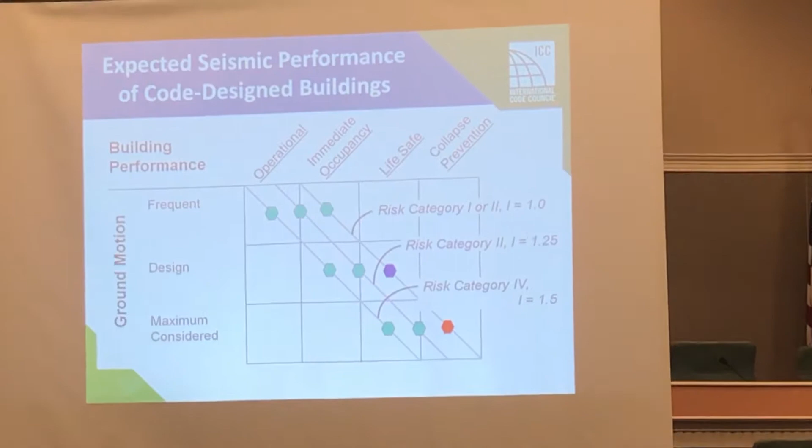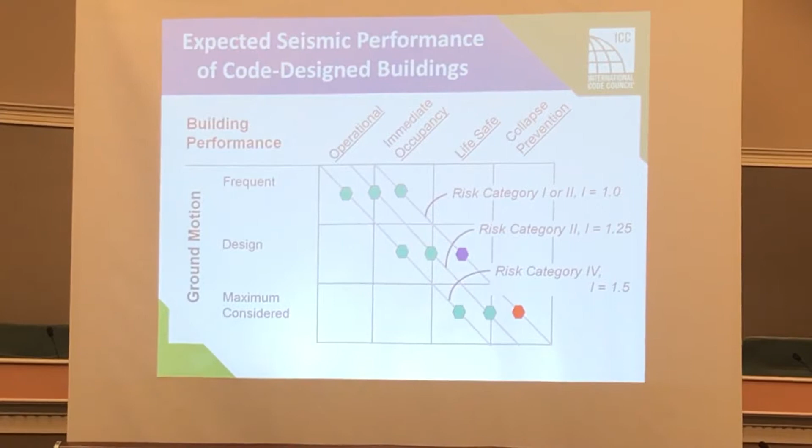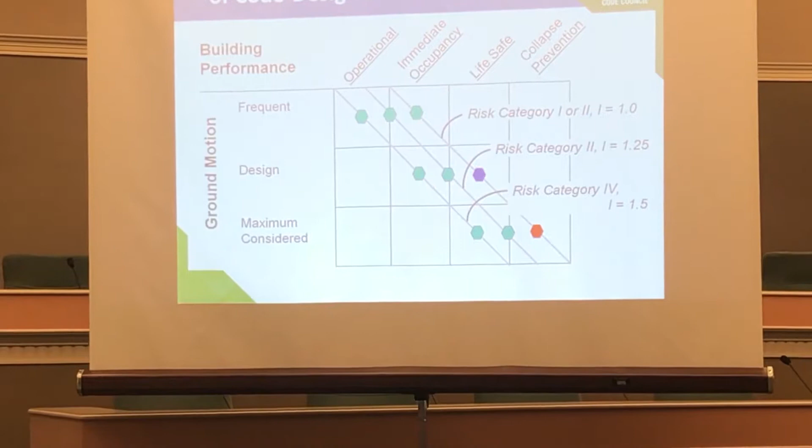So this is a quick look at what it is that we have been doing. Let me see, the pointer isn't very... it doesn't work.

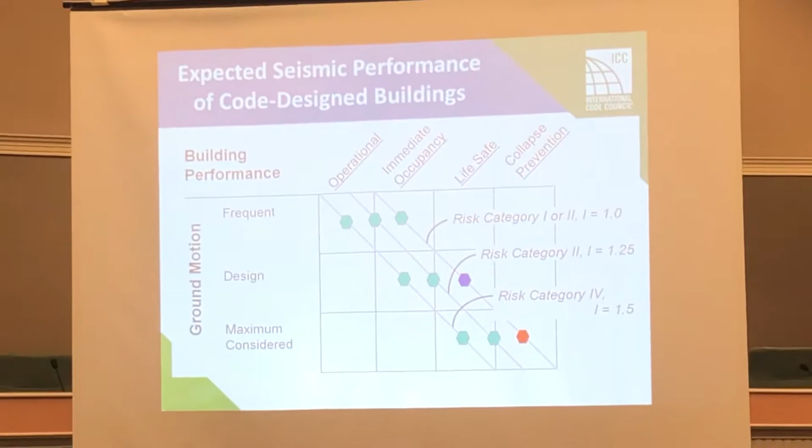Okay, so if you focus on the right-hand line which says risk category 1 or 2, those are the buildings that we design most of the time. Risk category 2 would be all office buildings, apartments, etc. So those buildings are being designed, if you look at the red dot, to not collapse in the maximum considered earthquake, which would be an earthquake that comes every 2,500 years or so.

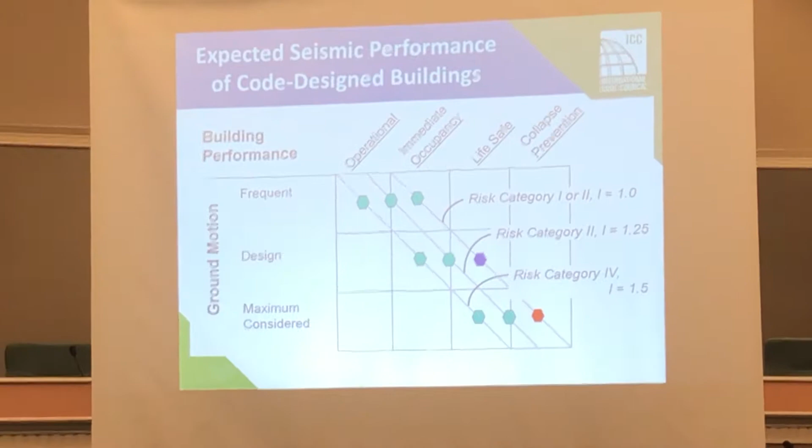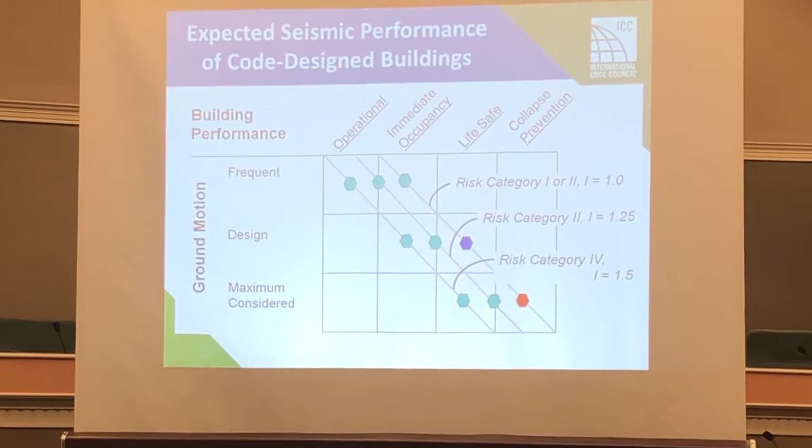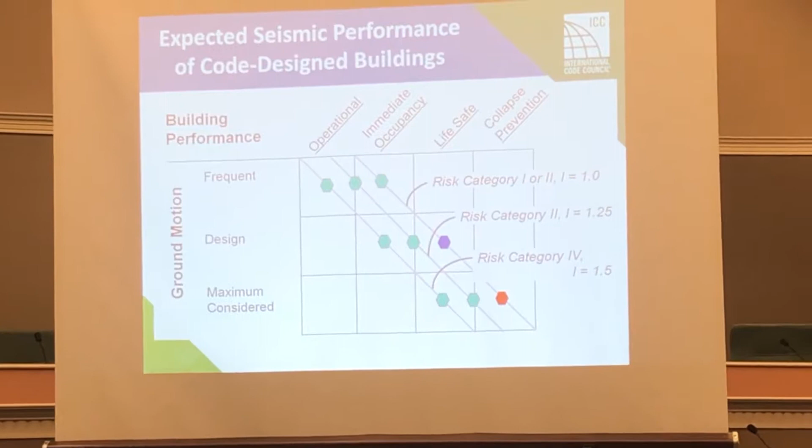The same building is supposed to be life safe in the design earthquake, which in California would be an earthquake that is likely every 500 years or so. In the east, that would be once every 1500 years maybe. And then in a frequent earthquake, which would be every 50, 70 years, somewhere near that, we are looking for immediate occupancy, so people should be able to move in immediately after the frequent earthquake.

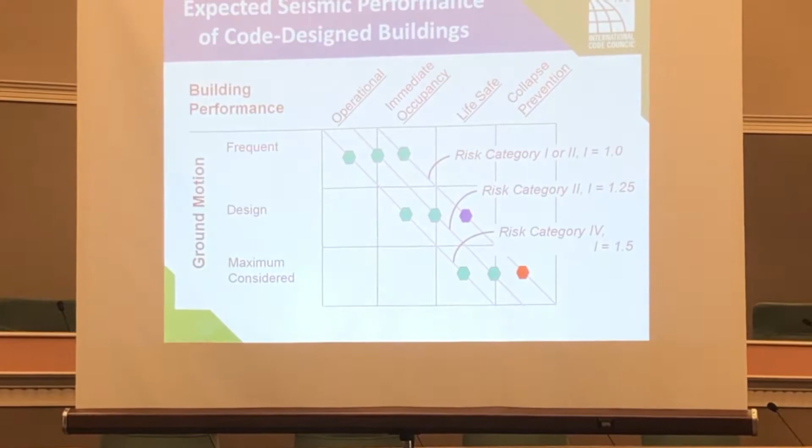Now, if you look at the leftmost line, risk category 4 structures, which are hospitals, police stations, fire stations, etc., those are designed to be life-safe in the maximum considered earthquake.

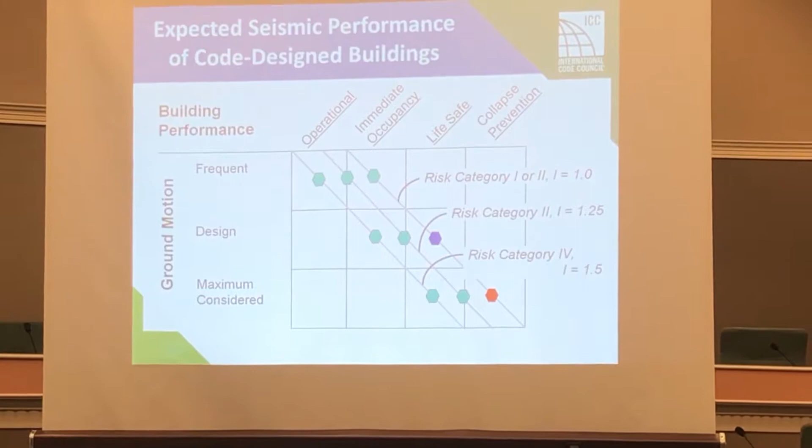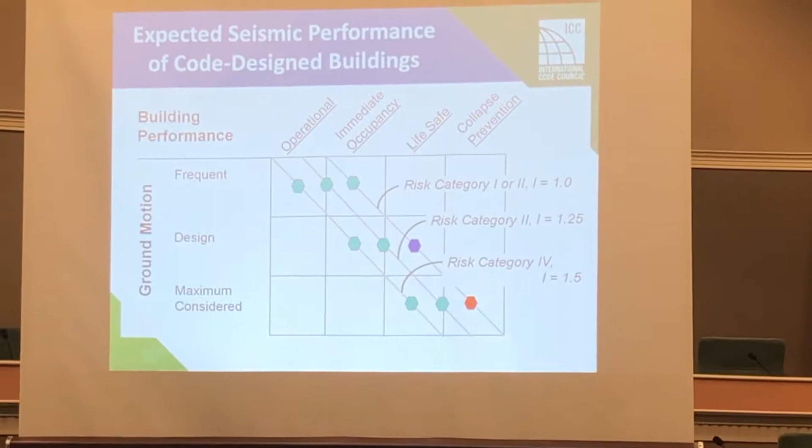If you move up to design earthquake, they are supposed to provide immediate occupancy after the design earthquake, so people should be able to move in. That doesn't mean everything works in the building, but it is safe to move into. Then in the frequent earthquake, it will be operational.

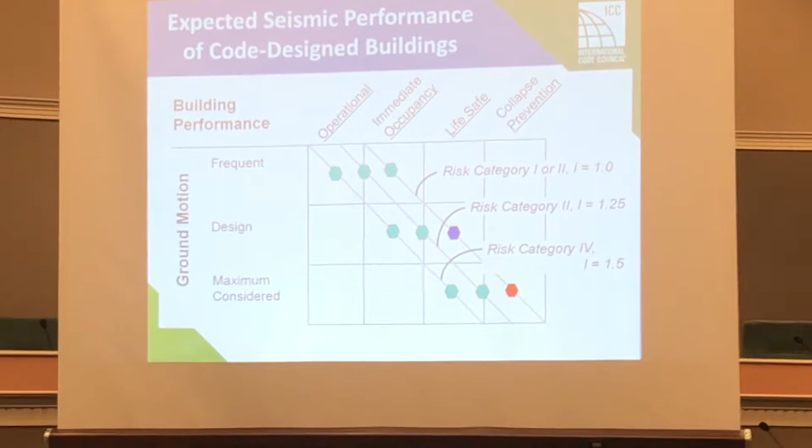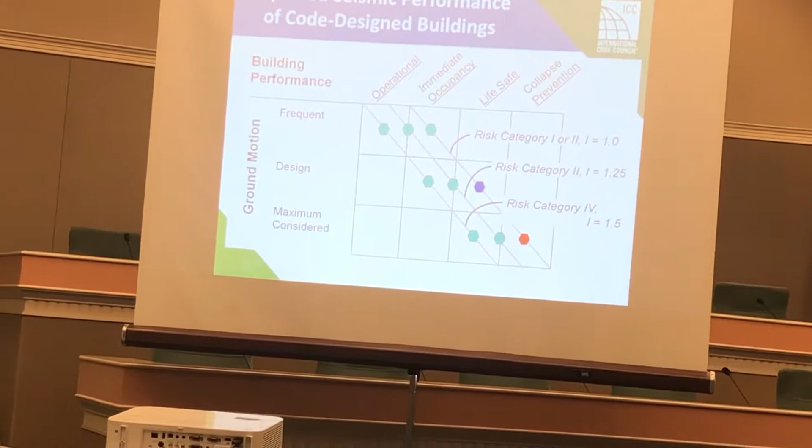Everything should be working, or almost everything should be working. Now, the criticism that has come, if I understand it, is that we are not designing risk category 2 buildings like risk category 4 buildings. We are not providing for immediate occupancy after the design earthquake.

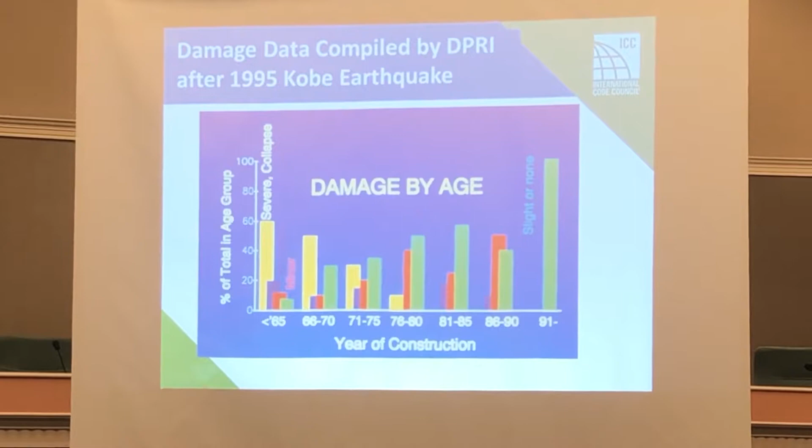This is a look at whether anyone around the world is doing better than we are. This is damage statistics from the 1995 Kobe earthquake from the Disaster Prevention Research Institute of Kyoto University.

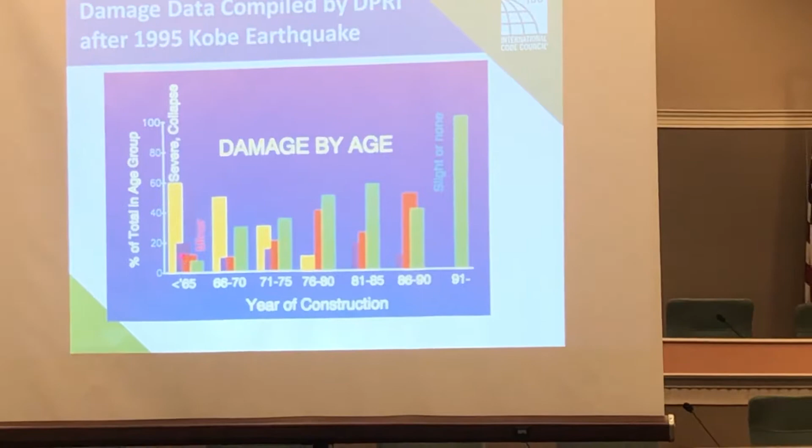On the x-axis is the age of the structure when it was constructed, as you see 71 to 75, 76 to 80, etc. The yellow is severe damage or collapse, the purple is moderate damage, the red is minor damage, and the green is basically no damage.

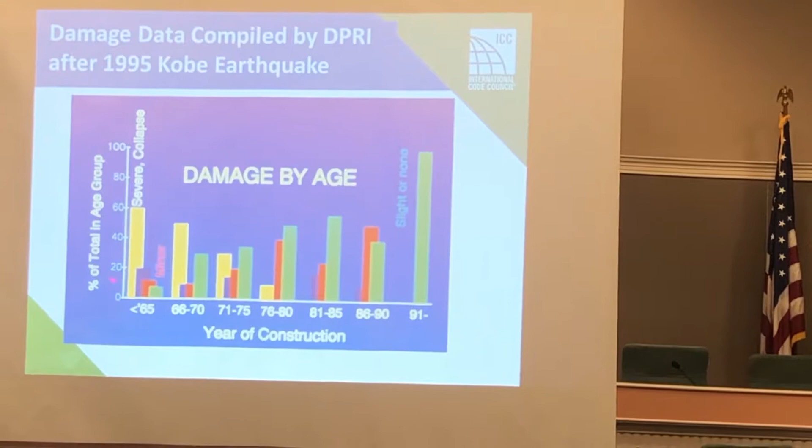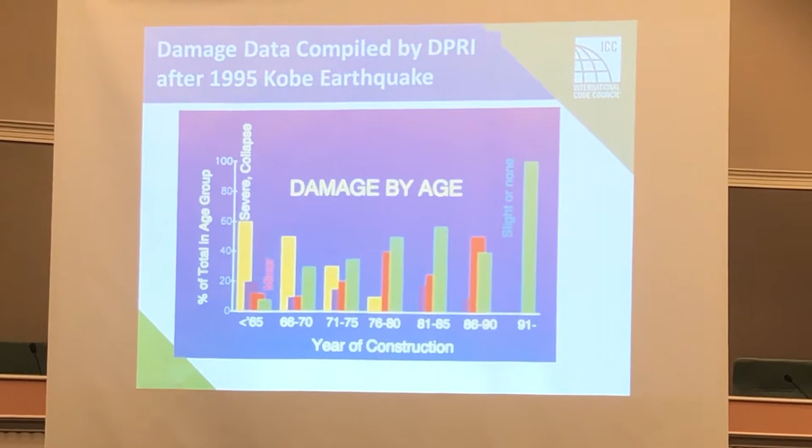Older buildings show a high percentage suffering severe damage and a very low percentage escaping any damage. If you look at buildings vintage 71 onwards, the percent of severe damage has gone down and no-damage cases have gone up. Buildings constructed after 1981 show absolutely no severe damage, and the newest buildings have all escaped damage. So there is correlation between damage and age of the structure.

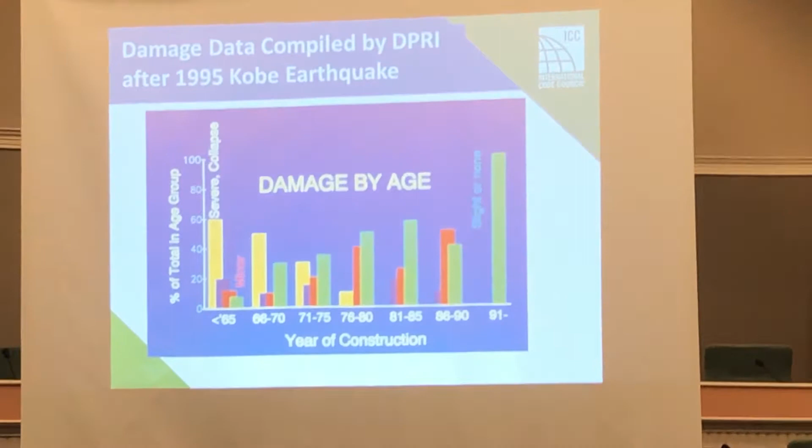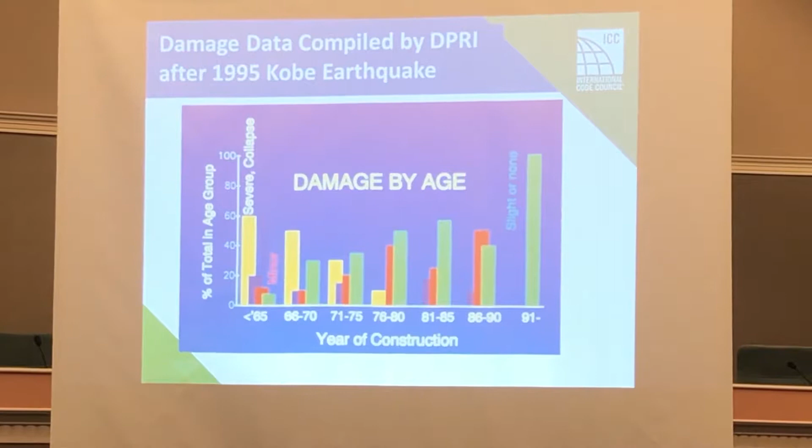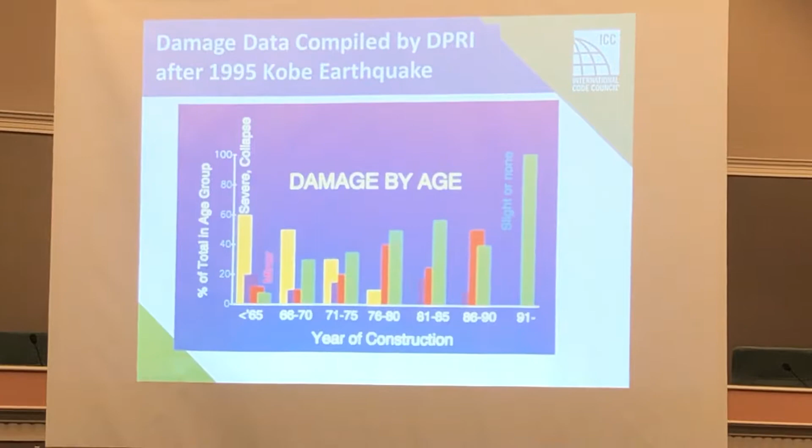The two milestones are 71 and 81, because after a major earthquake in 68, they made major changes to their building codes in 1971. After a second major earthquake in 78, they made a second change to their building codes in 1981. Structures designed by the 1981 code have done extremely well in all subsequent earthquakes, and there is absolute verification of that.

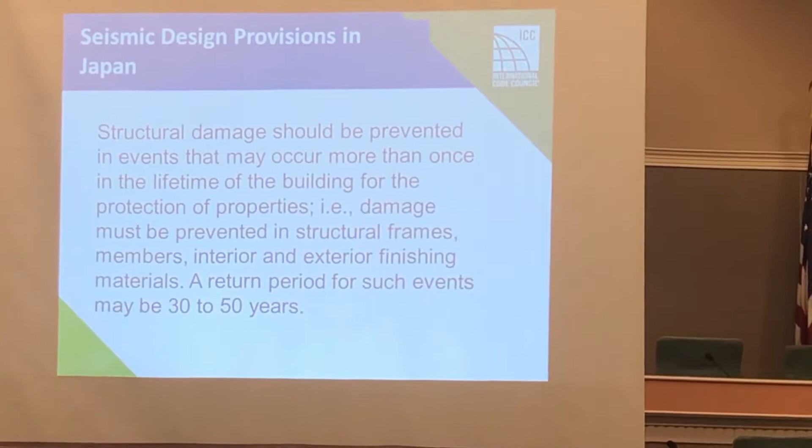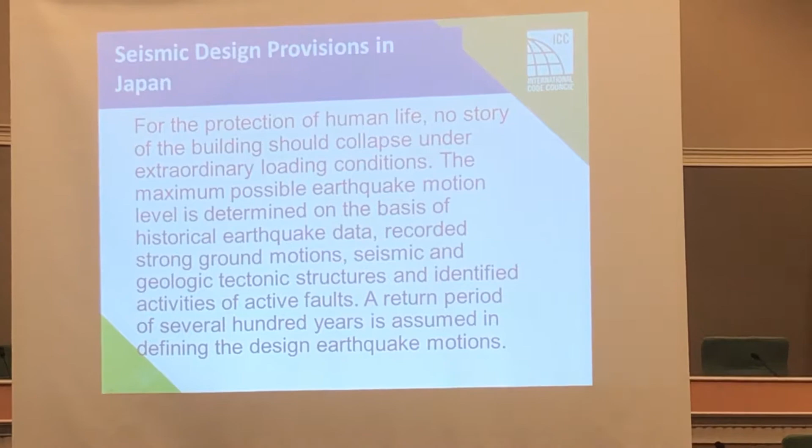The 81 change introduced a two-stage design. They are now designing to essentially prevent structural damage in events that may occur more than once in the lifetime of the building, an earthquake that comes every 30 to 50 years. They are also designing for protection of human life in a rarer earthquake with a return period of several hundred years. So, no damage in the frequent earthquake and life safety in an earthquake with a return period of several hundred years.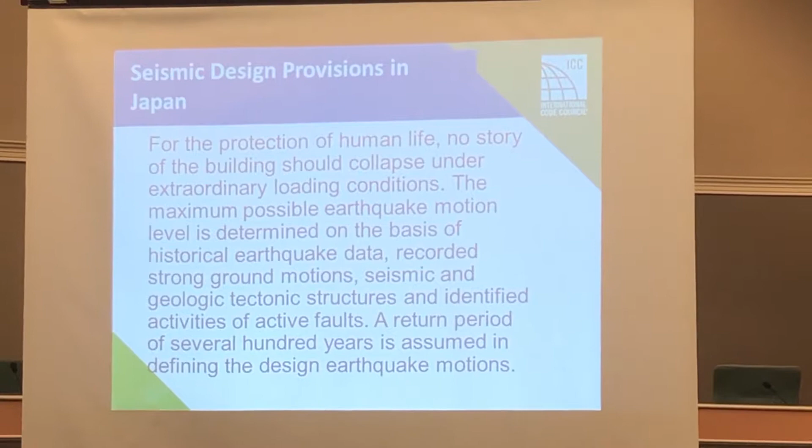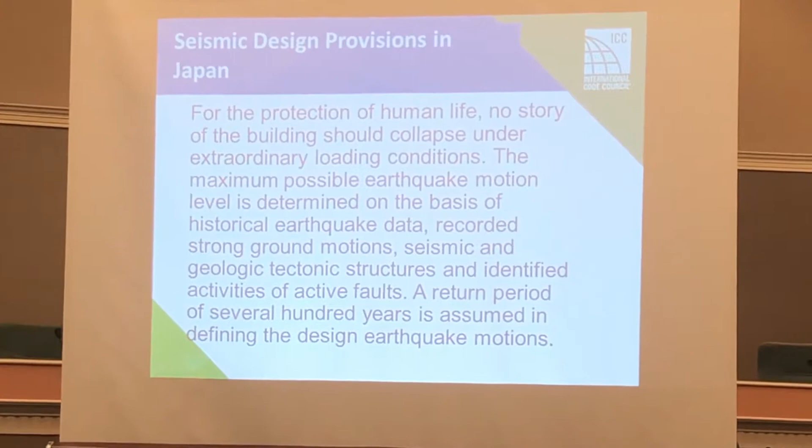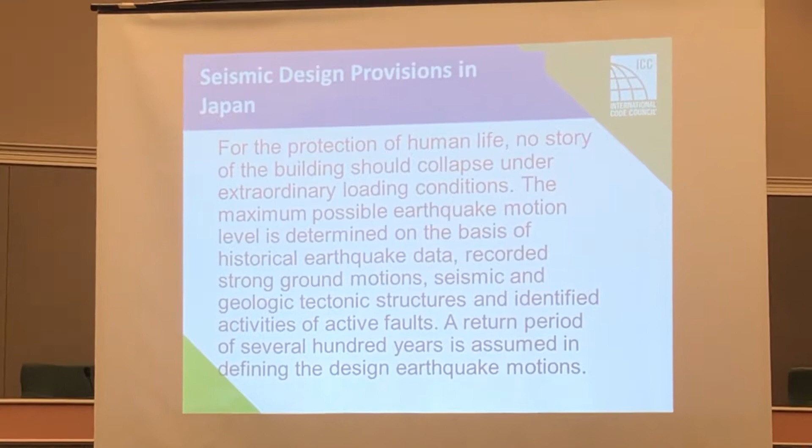Buildings designed by this two-stage procedure have done remarkably well. If you look into how they are achieving this two-stage solution, it is by providing more overall stiffness to their buildings than we do. Their buildings are stiffer, they move less in the design earthquake ground motion, and that accounts for the improved performance.

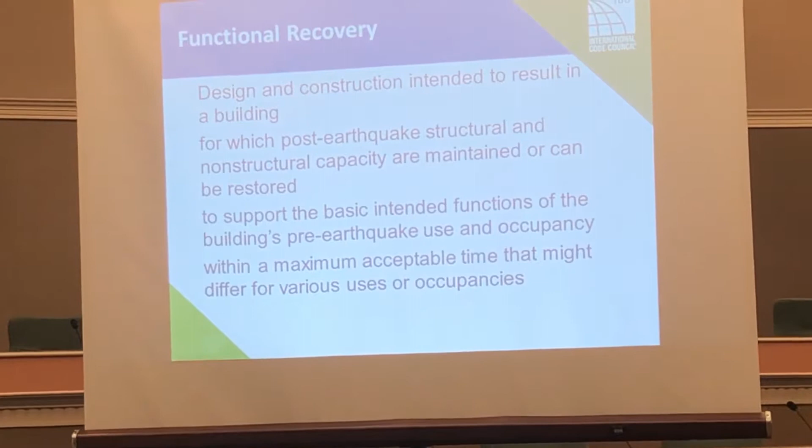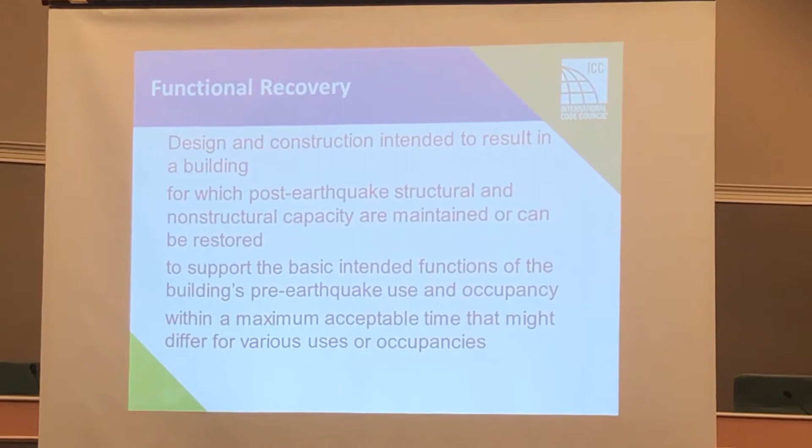Now, functional recovery, as Susan said, the definition has been widely distributed. I put the same definition up on the screen. The point I wanted to make is that post-earthquake structural and non-structural capacity are maintained or can be restored to support occupancy, etc. The key thing is within a maximum acceptable time that might differ for various uses or occupancies.

David Bonowitz has written what I found to be a very thoughtful paper for the next edition of the NEHRP provisions resource paper, where he makes the point that this recovery time could be variable depending upon the use category. But if the recovery time is very short, we are talking about immediate occupancy after the design earthquake. If the recovery period is long, then we are probably back to the design we have been doing over the last few decades.

Now, the key, as I said, is more stiffness in our structures. Does it cost more money? If it does, then I do not believe it is a solution that would be well received by the community. This slide reminds us of something we know: the homeless problem in California, in the big cities, all over the state. Affordable housing is already a problem, so we are definitely not looking for solutions that will increase construction costs or the cost of housing in any way.

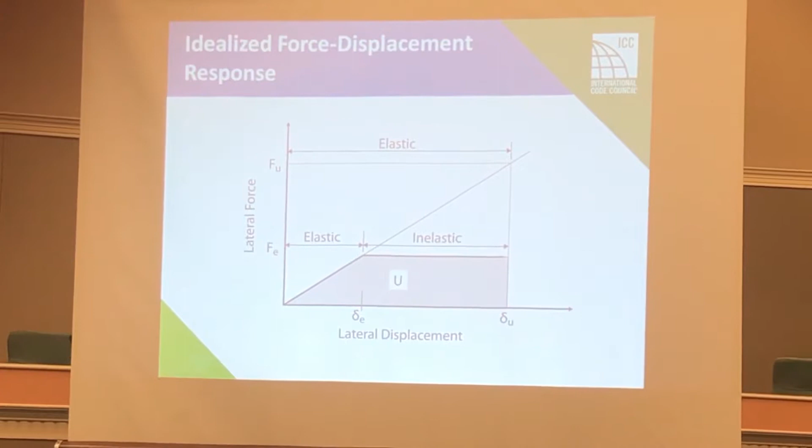So is there a solution that will give us what we need without costing more money?

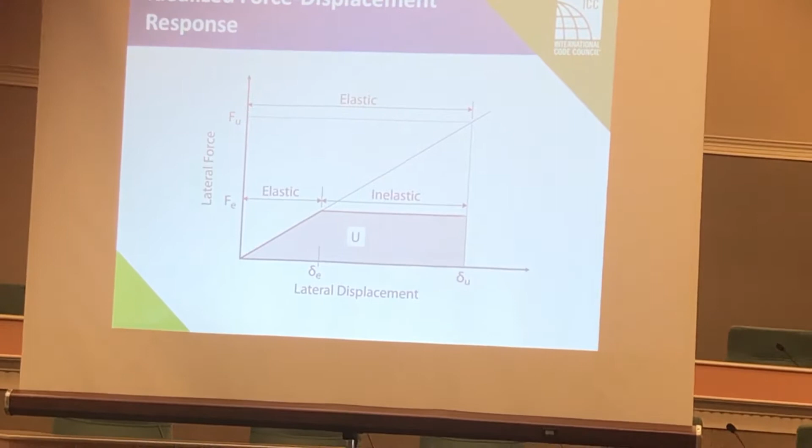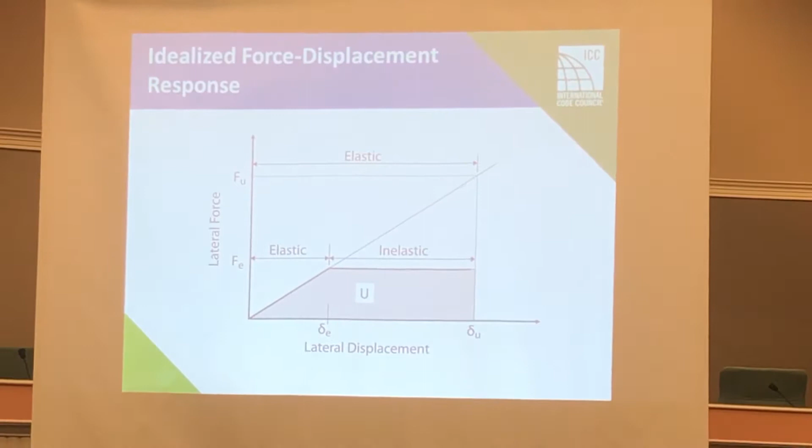In this picture, we are looking at the seismic response of a particular structure to the design earthquake of ASCE 7 or the IBC. On the y-axis are the forces induced in the structure by the earthquake, and the displacements that the structure suffers. Initially, we are showing elastic response, meaning there is no damage associated with the earthquake response. The earthquake passes, we get the structure back intact, no damage to be repaired.

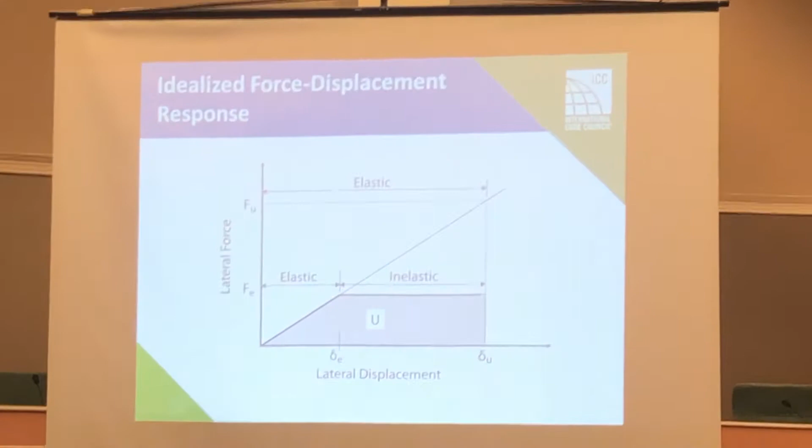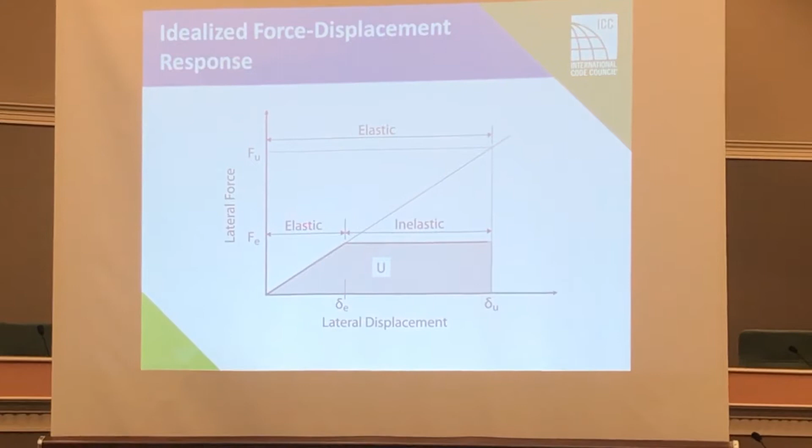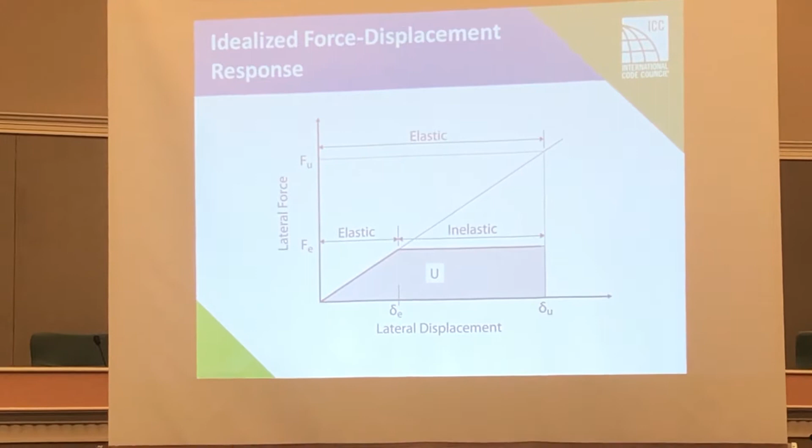Now, if I turn it, this elastically responding structure develops a force F sub u in the process of going through the earthquake and suffers a displacement delta sub u. If I turn around and say that we are now required to design this particular structure to respond elastically to this particular earthquake, the immediate conclusion would be we must provide to the structure a strength at least equal to F sub u.

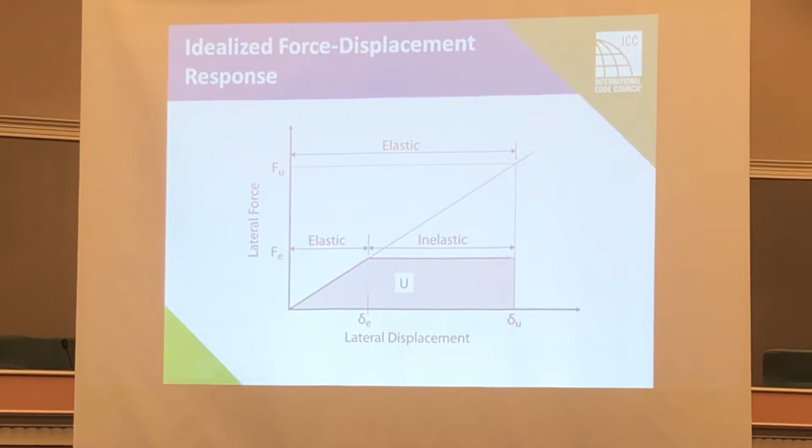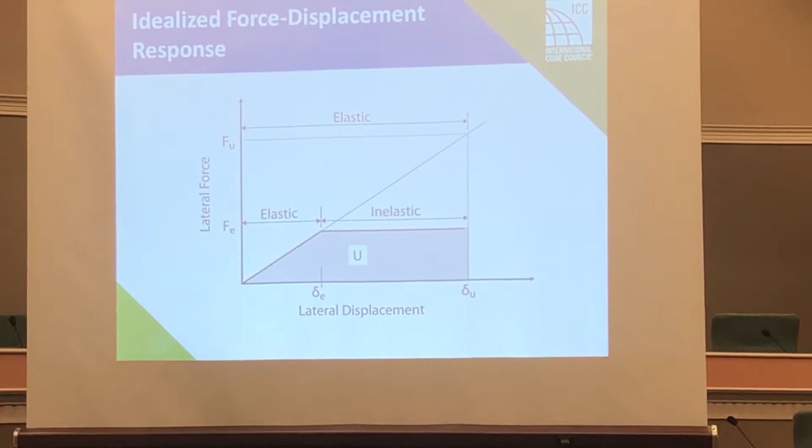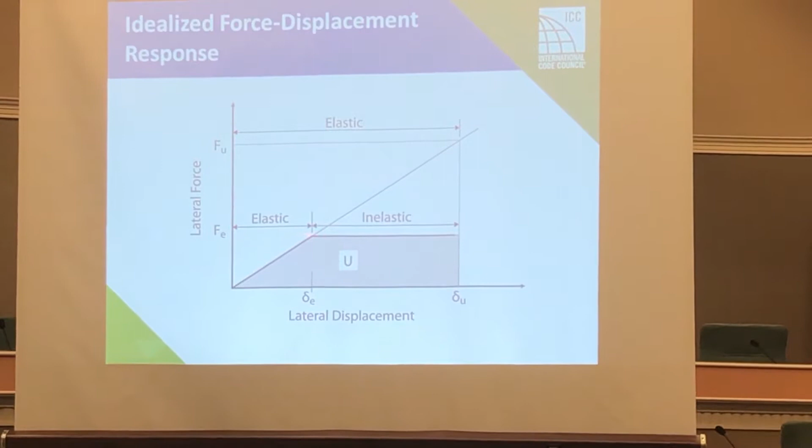If we decide we cannot afford that, all we can afford is a much lower strength level F sub e, then if the design earthquake comes and hits our structure, when the earthquake-induced forces equal and then exceed the supply strength level, the structure will start cracking and yielding in places. That will be the beginning of inelastic displacements, which are associated with damage. We will not get our structure back intact following the earthquake.

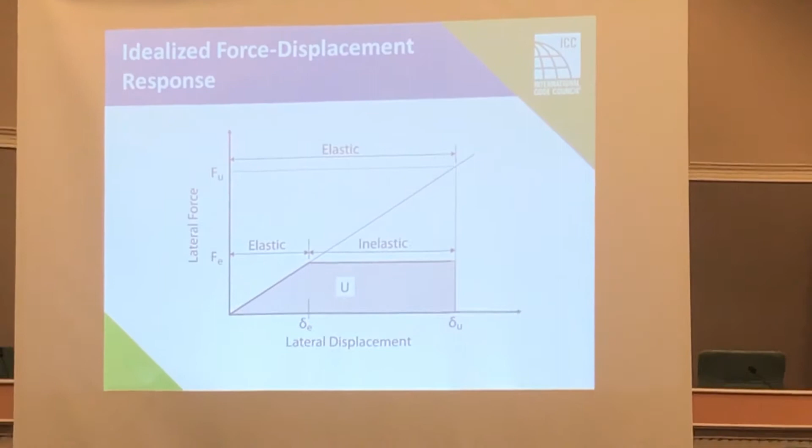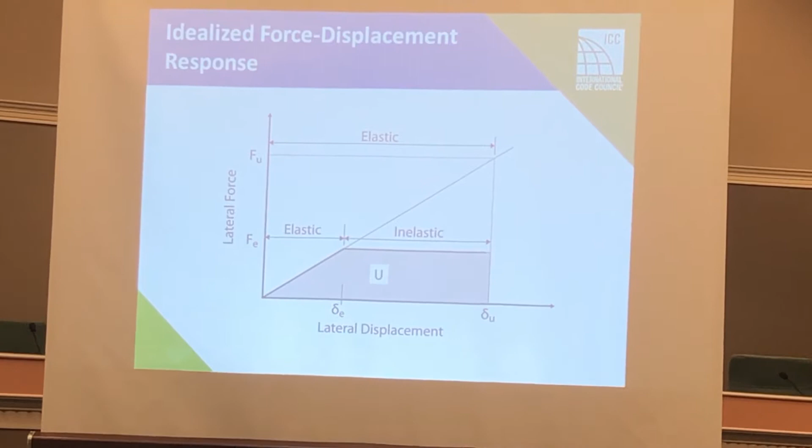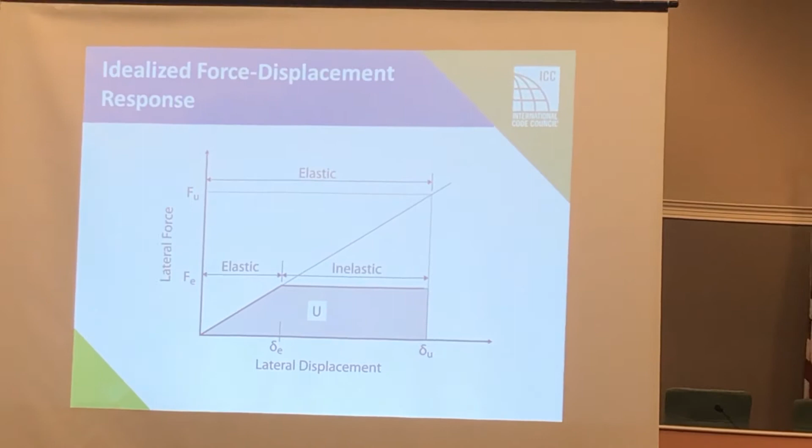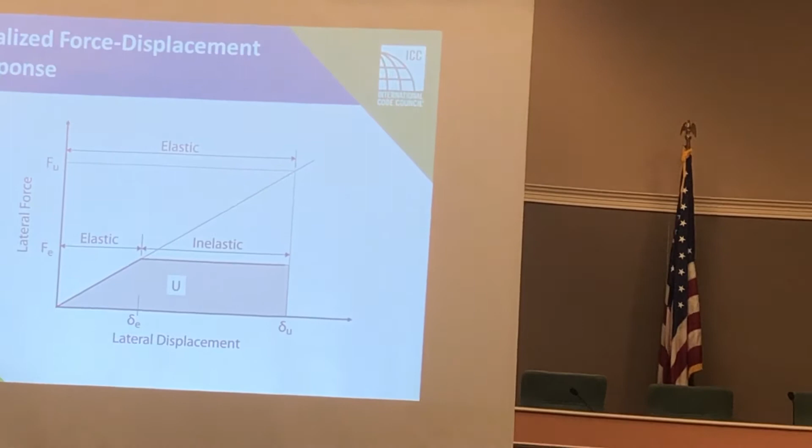Now, we know based on observations and studies that the total displacement suffered by this inelastically responding structure is about the same as the elastically responding structure. The difference is that much of the displacement is now inelastic, which has damage associated with it. This inelastic displacement needs to be within the inelastic deformation capacity of the structure, over which gravity loads can be sustained. Inelastic deformability comes from proper detailing of the members and the joints. So if we design for large inelastic displacements, we have to do fancy detailing, which we do by our codes and standards.

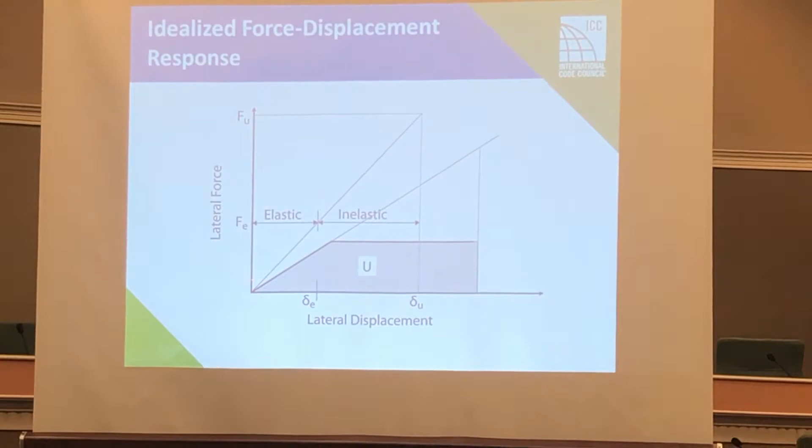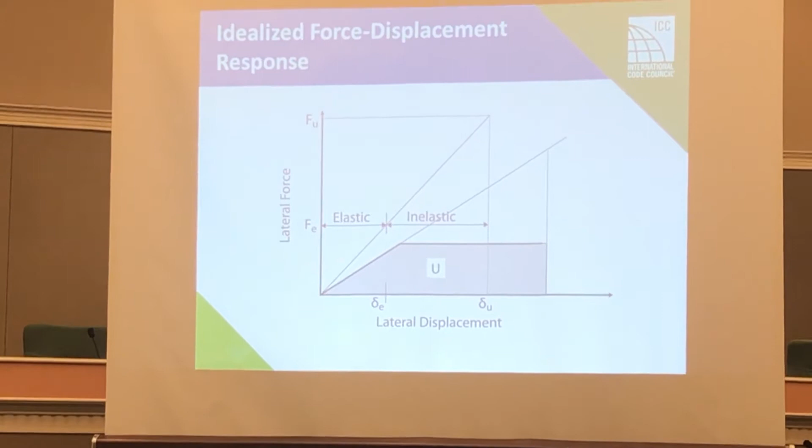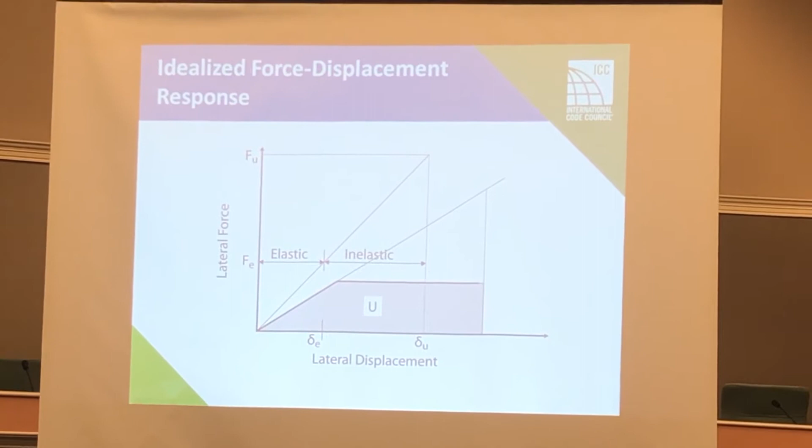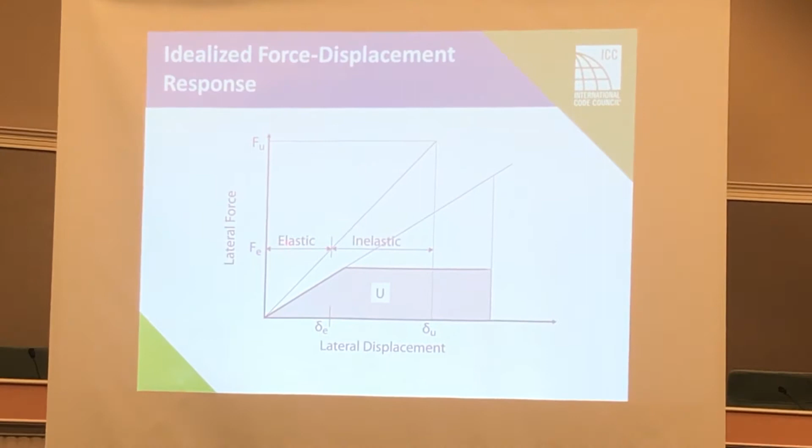Now, if we are going for a stiffer solution, if our structure is like this rather than that, the stiffer structure will attract more force to itself. So the seismic response of the stiffer structure will be depicted by this line. The point I'm trying to make is that the inelastic displacement is now much lower than that of the less stiff structure, and that should require less fancy detailing, which can save us significant amounts of money. So if we go for a stiffer solution, the stiffness itself may cost more, but the savings in detailing may very well more than compensate for the extra cost of stiffness.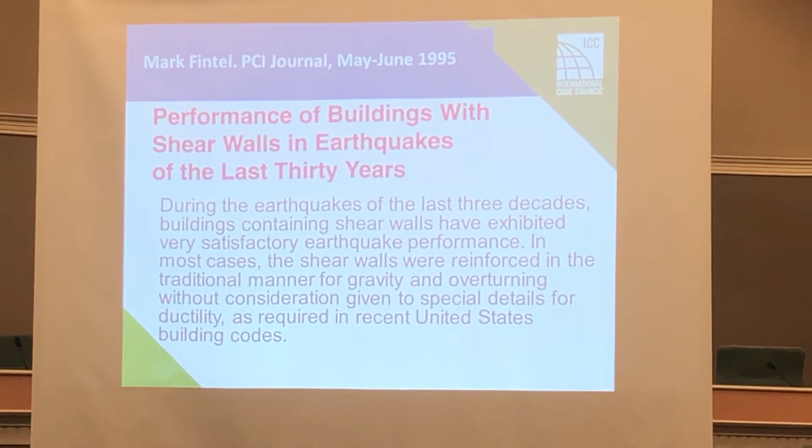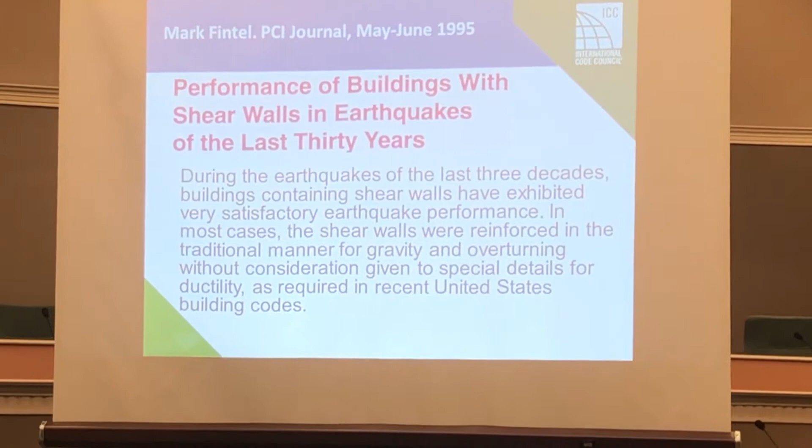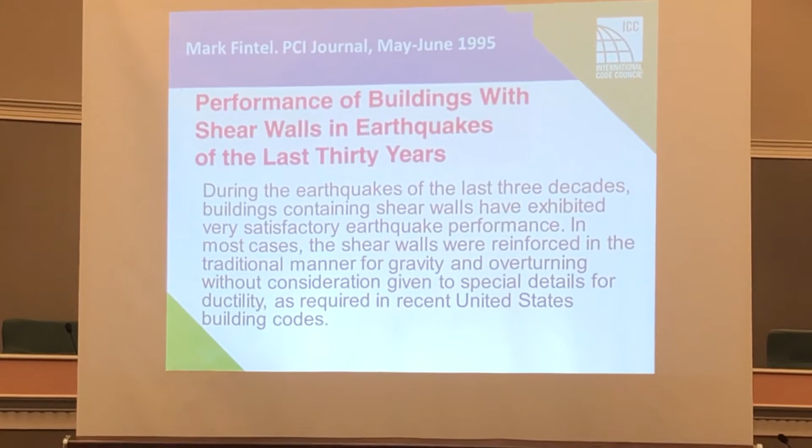Time is almost over, but I want to throw in a couple more slides to make this point, which is kind of verified. This is a paper from the PCI Journal, 1995, that has shown that in earthquakes around the world, structures with concrete shear walls, which are stiff structures, have done extremely well, although the shear walls quite often have been very poorly detailed compared to the way we detail in this country.

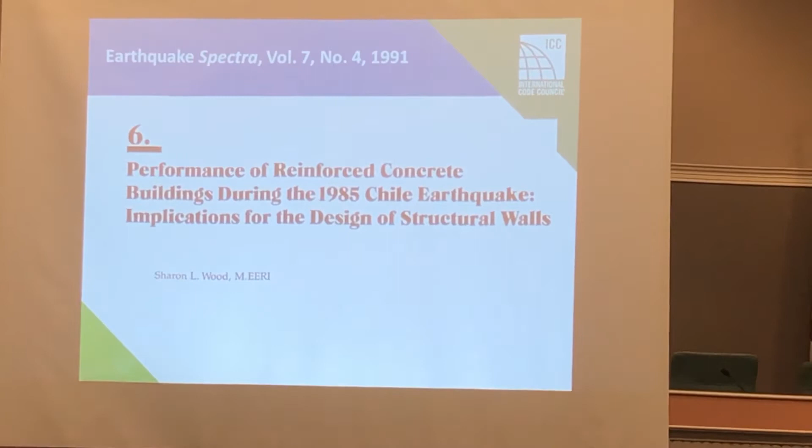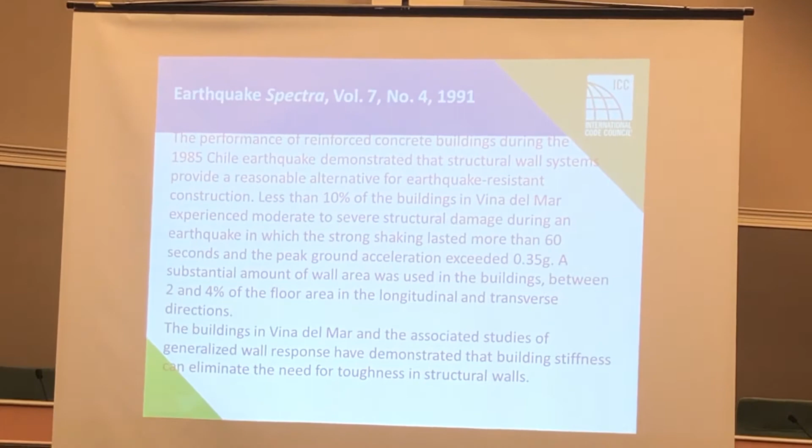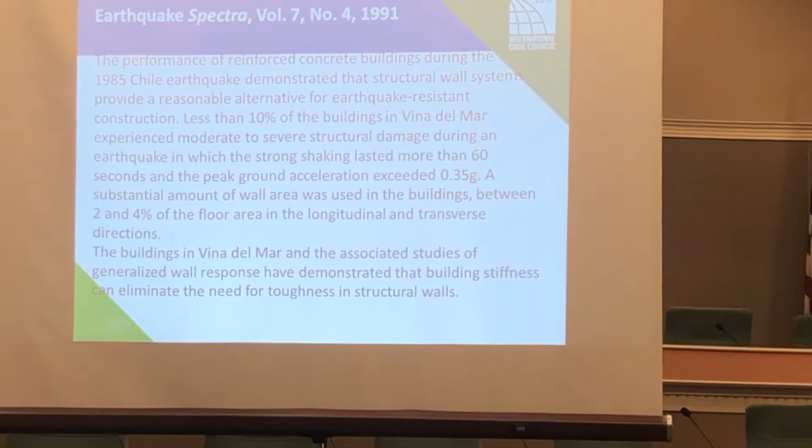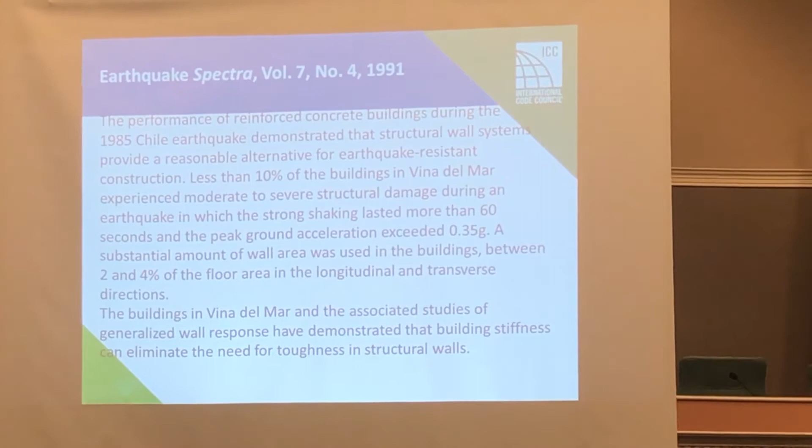After the 1985 Chilean earthquake, Sharon Wood wrote a paper, and I would read only the last three lines. The buildings in Viña del Mar and the associated studies have demonstrated that building stiffness can eliminate the need for toughness in structural walls. That's the point I want to make. So if the building is stiff, our walls do not have to be detailed in the fancy way that we have been detailing our structures.

So the summary of what I'm saying is that if we want to go towards functional recovery, we should be designing stiffer structures. I'm not suggesting that always means including shear walls; stiffness can be achieved in many ways. And if we go for stiffer structures, we should get away from our attachment to fancy detailing, which has become almost an addiction now. We should re-examine the very fancy detailing we are doing, and that has the potential of saving significant money, which will probably more than pay for the stiffness that we need.